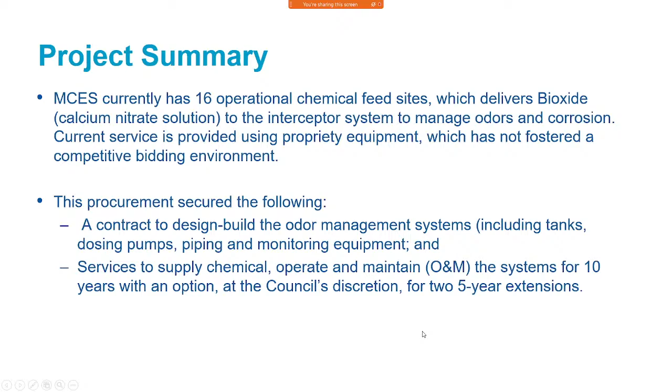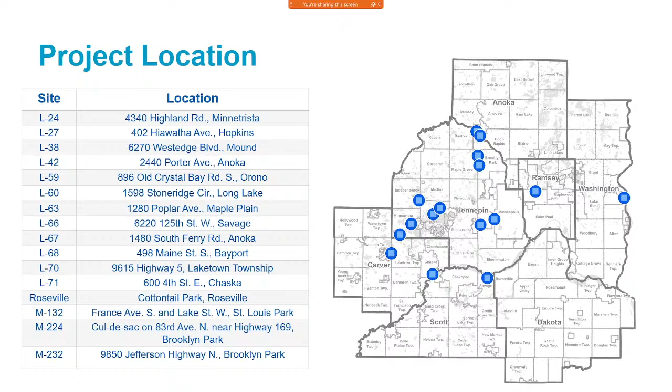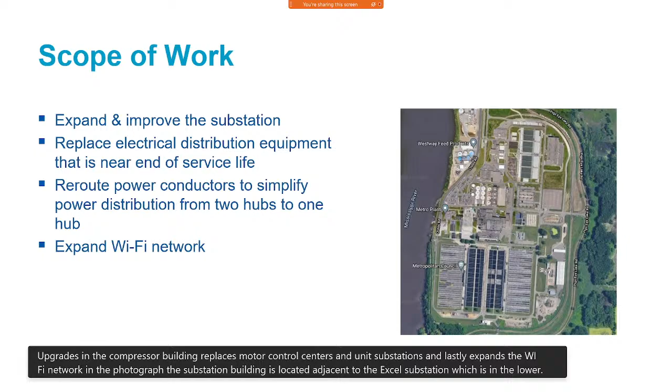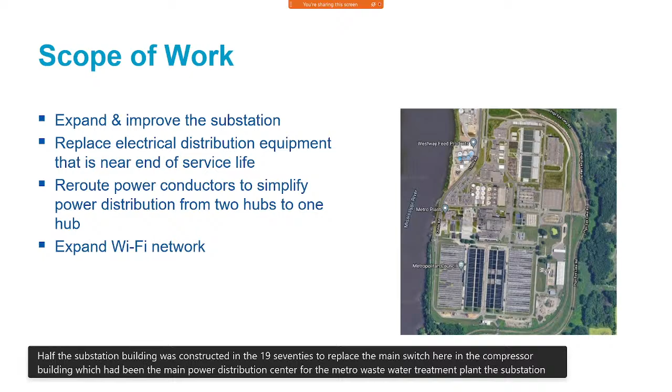In the photograph, the substation building is located adjacent to the Xcel substation, in the lower right-hand portion of the photograph. The substation building was constructed in the 1970s to replace the main switchgear in the compressor building, which had been the main power distribution center for the Metro Wastewater Treatment Plant. The substation is the primary building to distribute 13.8 kilovolt power throughout the plant and is configured with 4 buses, each connected to incoming power from Xcel Energy.

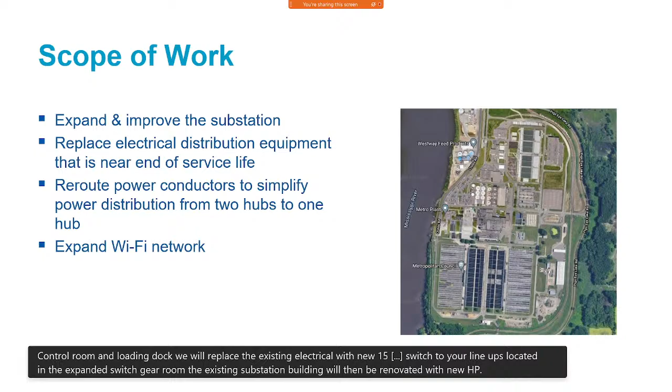This project expands the main substation building to the north and will include a new cable vault room, switchgear room, control room, and loading dock. We will replace the existing electrical gear with new 15 kilovolt switchgear lineups located in the expanded switchgear room. The existing substation building will then be renovated with new HVAC equipment, new storage room, and space for a generator bus.

As I mentioned, the compressor building was originally the main power distribution center until the late 1970s. Subsequent electrical improvements to the distribution since then have begun to shift loads away from the building. This project continues that goal by rerouting power conductors to simplify power distribution from 2 hubs to 1 hub, the substation building.

This project will also remove 20 existing substations throughout the plant and replace them with 13 new substations. Similarly, we are removing 37 motor control centers and replacing them with 24 new motor control centers and 20 panels and switchboards.

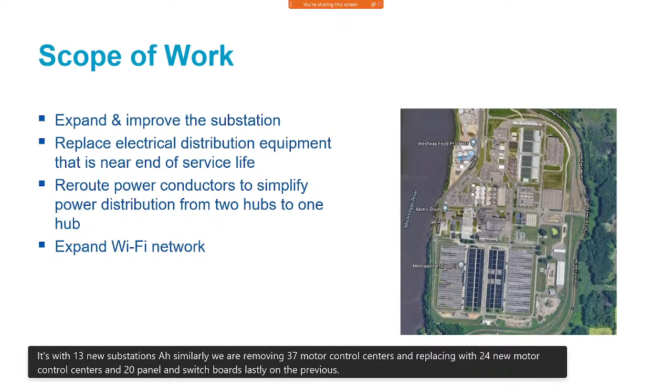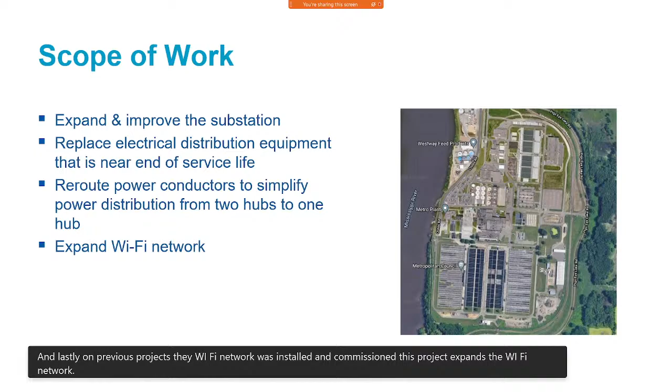Lastly, on previous projects a Wi-Fi network was installed and commissioned. This project expands the Wi-Fi network by installing additional access points. Next slide, please.

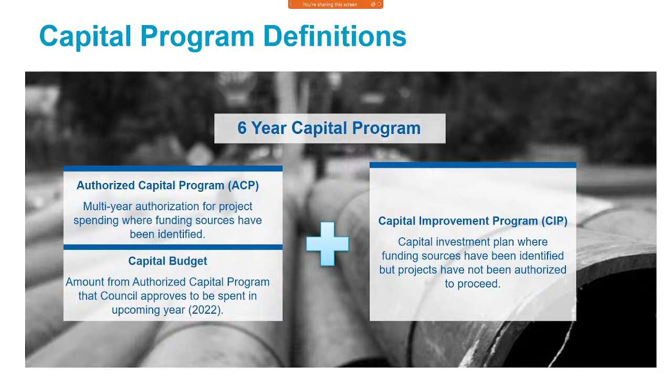This slide is just to remind us all of some terms you will hear throughout the presentation. The Authorized Capital Program, or ACP, is the multi-year authorization for project spending where funding sources have been identified. Adjustments made to the ACP include additions of budget adjustments to existing projects, addition of new projects, and subtraction or deletion of projects that have been closed. The capital budget is the amount from the Authorized Capital Program that Council approves to be spent in the upcoming year. That does not mean these projects don't come back to the council, because most of our capital projects are over the threshold that requires council action. The capital improvement program, or CIP, is the capital investment plan where funding sources have been identified, but projects have not been authorized to proceed.

This slide shows historical and projected spending. The 2021 approved capital budget is $185 million. Typically we spend about 80% of the approved budget, and that's our typical plan. At this time, we anticipate spending between $120 and $130 million in 2021, and the underrun is related to cost underruns, project delays related to equipment acquisitions, contractor resources and availability, staffing resources, and coordination with other entities. The committee will see that we propose an increase for our projected spending in years 2022 through 2027, because we have some very large capital projects in our portfolio.

Those include the 4th incinerator at the Metro plant, relocation of the Hastings Wastewater Treatment Plant, construction of the Crow River plant—moving the plant from Rogers to a new site in Rogers along the Crow River—construction of lift station L32A in Fridley, and capacity improvements needed in the Interceptor system, including the St. Bonifacius Forcemain and Lake Elmo.

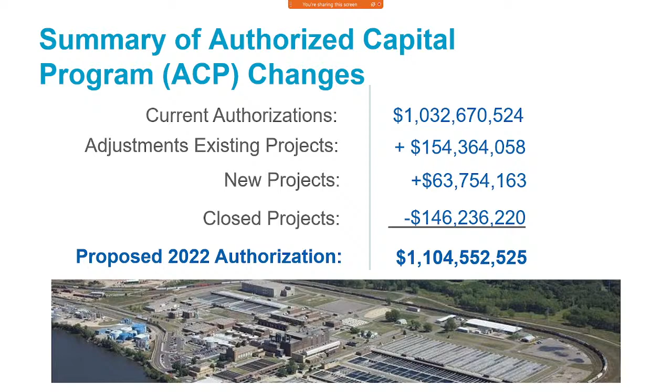The capital program consists of projects that have three objectives. First is asset preservation. Asset preservation works to maintain the performance and value of our existing assets, and this represents 62% of our planned investments.

Secondly, we have capacity improvements. Capacity improvements are needed because we are in a thriving and growing region, and so we need to extend facilities and add capacity to our system in order to facilitate growth. This represents about 15% of our planned investments.

Finally, we have drivers that include improvement of quality of service by responding to more stringent regulations, implementing wastewater reuse projects at our wastewater treatment plants, increasing system reliability, and conserving or generating energy. This represents 22% of our planned investments.

Finally, our projects are broken down between plants and interceptors, and we project to spend about 55% in our treatment plants and about 45% in our interceptor system.

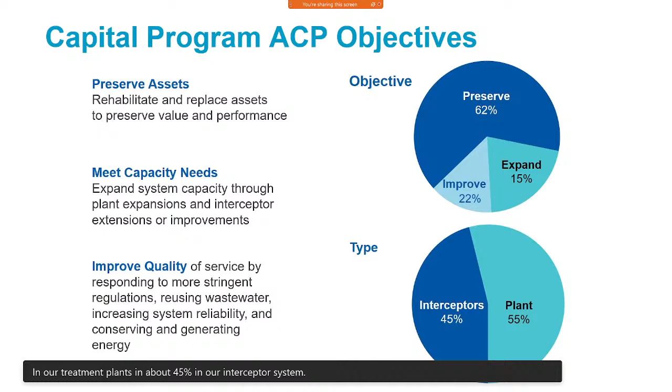In summary, the proposed 2022 through 2027 capital program totals $1,693 million, of which $1,104 million is in the capital program and $589 million is in the capital improvement program. The proposed 2022 capital budget is $227 million, and all of this is recommended to be incorporated in the council's unified capital budget.

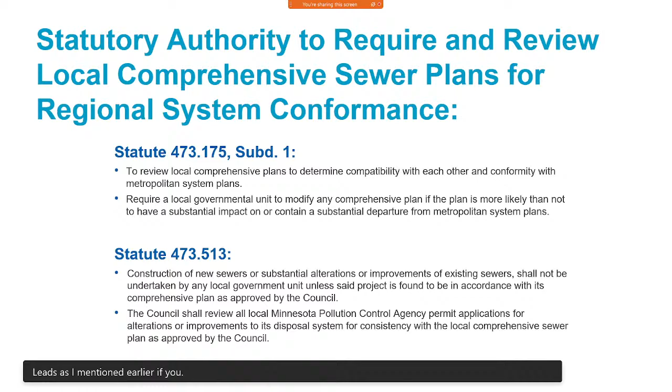Today, I'll be providing one example of a project being included in the 2022 capital program: the current wastewater system plan identifies a future wastewater treatment facility in western Scott County. The county included land use guiding in its 2040 plan that limits development at low densities, meaning 1 unit per 10 acres or lower, preserving it for future redevelopment utilizing regional wastewater service.

The system plan identified 2 potential sites from an initial review of 6 sites in western Scott County. The council recently submitted an offer on one of these 2 sites. The future facility will have a long-term capacity of at least 25 million gallons per day.

A facility of this size will not only provide service to the areas of western Scott County in the future that will require regional wastewater service, but it will also offer the ability to serve portions of eastern Carver County by diverting flow away from the Blue Lake service area and redirecting it to the new Scott County wastewater treatment plant. This will free up capacity at Blue Lake to accommodate additional growth within its service area.

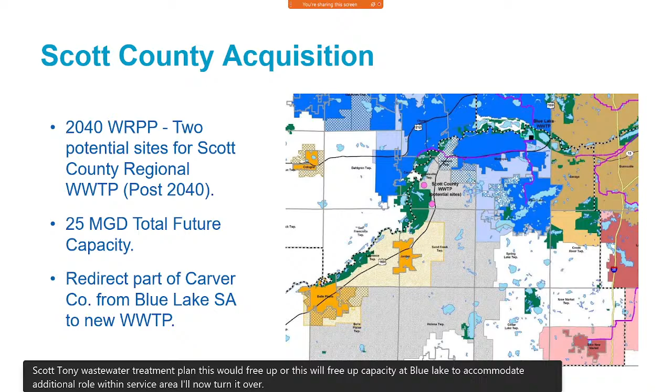I'll now turn it over to Rene to review some of the treatment plant projects in the 2022 capital program. Next slide.

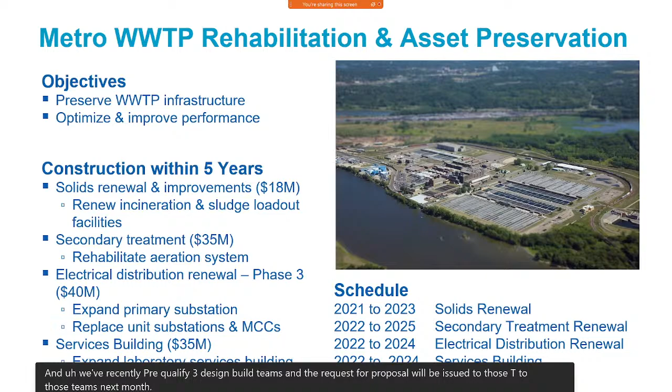This slide is just an overview of the Metro Plant Electrical Renewal Program. Phase 1 is complete. It rehabilitated motor control centers, installed Wi-Fi network at the Metro plant, and upgraded transformers at the compressor building. And phase 2, that's an ongoing project to rehabilitate the motors for 7 very large compressors at the plant that supply air for process treatment. It's a combination of 300 horsepower and 3,000 horsepower and 5,500 horsepower motors.

As Tim Amsutz covered earlier, Phase 3 continues the renewal of electrical equipment and includes expansion and improvement of the primary substation. And throughout this program, we're incorporating arc flash labeling and mitigation measures so that we reduce the risk of electrical injury to whether it's maintaining, operating equipment or others nearby. Next.

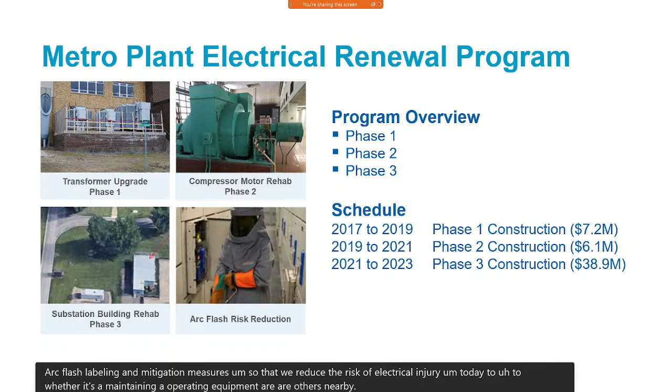A third active facility plan for the Metro plant was approved by the council in 2019. It's called the Metro Solids Management Improvements. And this plan provides for installation of a fourth incinerator at the plant, followed by another renewal of the existing 3 incinerators. The existing incinerators need a more extensive renewal than we've been able to complete due to process constraints. And the renewal work will require that each incinerator be taken out of service for about a year.

The fourth incinerator will be constructed 2024 through 2026 using design build delivery. And then the renewal work will be constructed 2027 through 2029 using design bid build delivery. The fourth incinerator will provide solids treatment capacity needed to complete the renewal work, and it will also serve regional population growth through 2050. Between 2020 and 2050, there are 500,000 new residents expected in the Metro plant service area. Next.

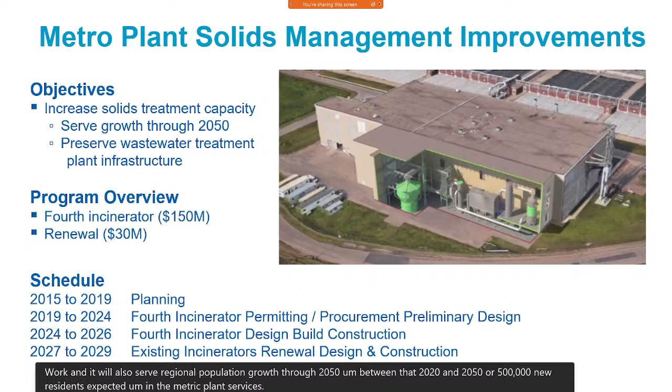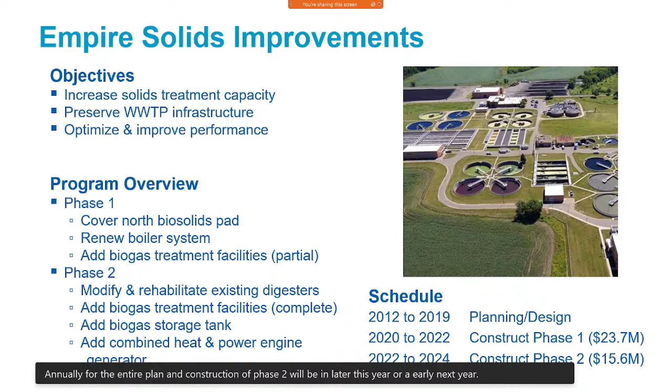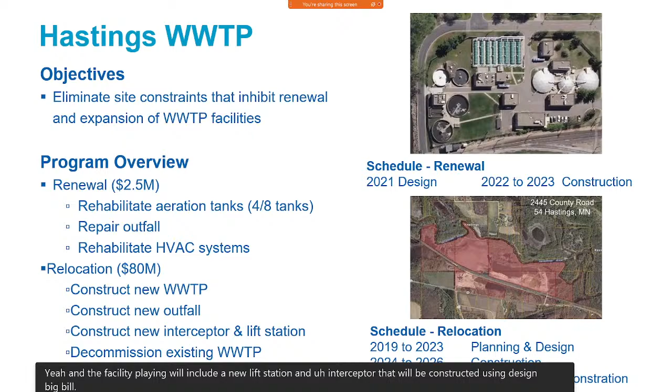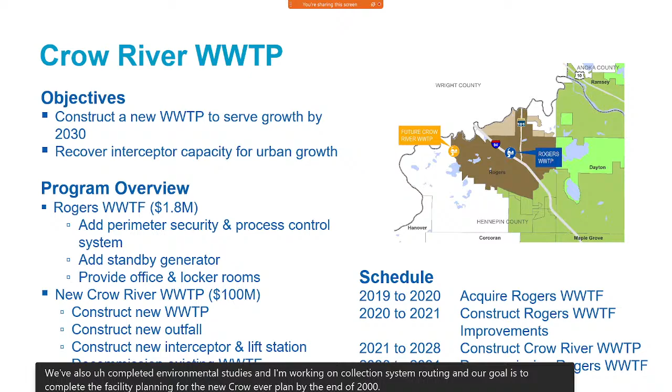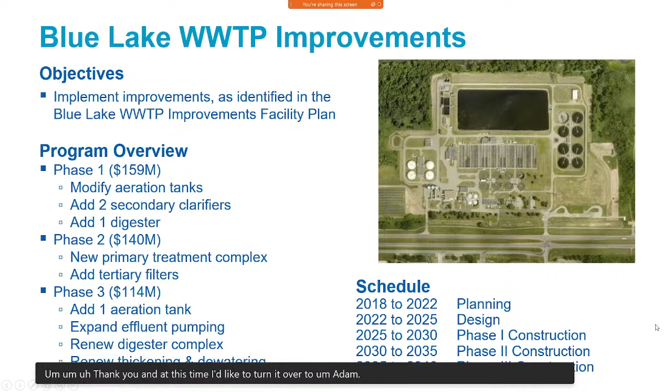Thank you. At this time, I'd like to turn it over to Adam, who will present overviews for the Interceptor engineering. Thank you, Rene, and committee members. This is Adam Gordon, manager of the Interceptor Engineering Group. I'd like to present a selection of projects that are part of the capital improvement program.

These projects address capacity needs, condition issues, or advance coordination with other entities. Go to the next slide.

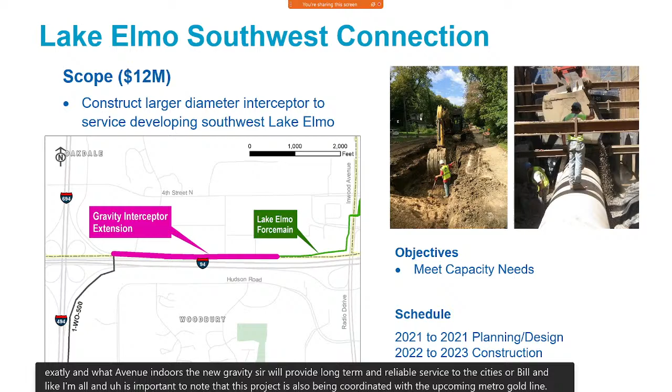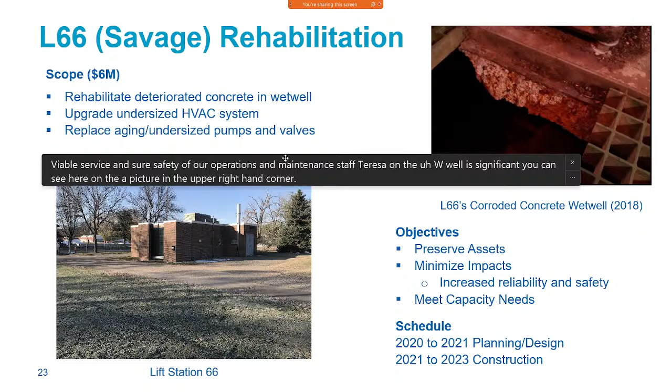The deterioration in the wet well is significant, as you can see in the picture in the upper right-hand corner, where the supports that support the grating have deteriorated. Rehabbing the wet well to get rid of the corroded concrete, rebuild those surfaces, and coat them to protect against H2S corrosion, as well as improving the HVAC to increase ventilation, will ensure the safety of our operations and maintenance staff. The lift station also requires upsizing the pumps and piping to meet future capacity needs.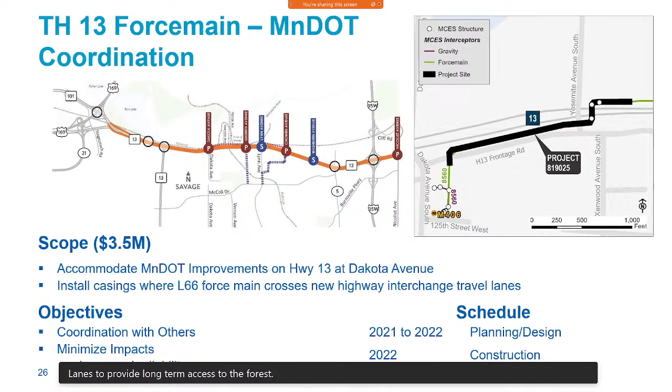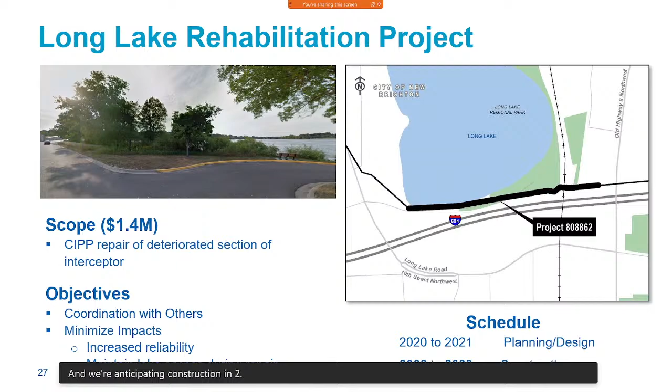And we're anticipating construction in 2022. And the next slide, and with that, I'll turn it back over to Jeannine to discuss the schedule.

Thank you, Adam, and thanks Rene and Kyle also for your presentation. Mr. Chair and council members, before you see the schedule, as you can see in May, our finance director, Ned Smith, presented budget concepts to you. Our capital program is presented tonight, and then as we move forward into the fall, there's division level capital program presentations in October, with adoption of public comments on the draft budgets in October 2021. And then finally, the adoption of the final 2022 budget levies is scheduled for December of 2021.

And with that, that concludes our presentation. If you have questions for any of the presenters tonight, we're available. Thank you. Thanks to all of the presenters this afternoon. Any questions from the committee members?

Chair. Councilmember Sterner: Yes, I just had kind of a question. I want to say great presentation, I really like the knowledge and trying to really understand it. But one of my questions is, we have a great track record in monitoring our plants. So when we redo like a Rogers or a Hastings plant, do we start over with a brand new plant record, or since it's a replacement of the same plant, do they keep their longevity of perfect monitoring going forward?